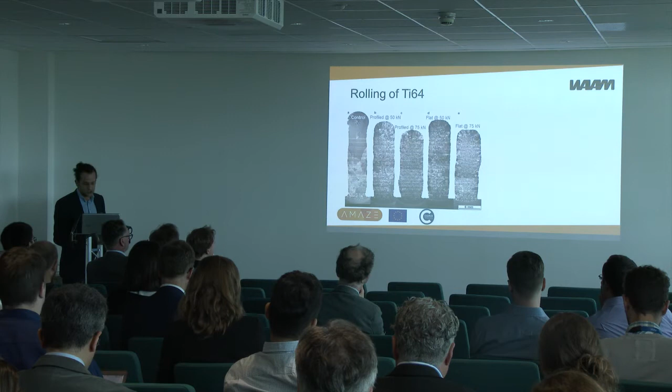Then we also looked at the texture, and we saw that also the texture is changed. And you can see, first of all, the completely different scale bar. So these grains are actually much smaller than what you can see there. But the other thing you need to see is that in this case, the color scheme suggests that the grains are growing all in the vertical direction in the 001, and that also gives anisotropy to the mechanical properties.

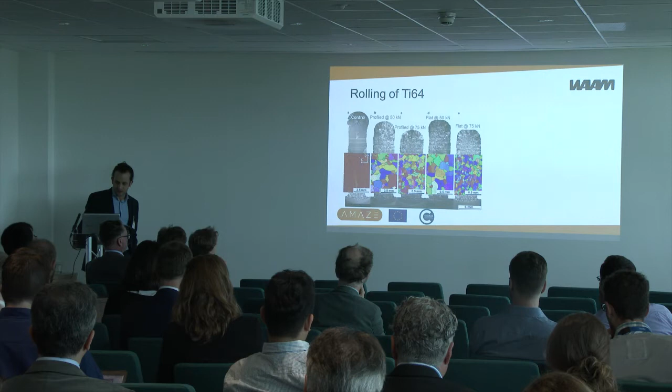While in this case, as you can see, the colors are much more random, and therefore we could argue that the texture is much less than the control case. We also measure the residual stress, and you can see here stress is measured with two different techniques. In this case, we are using a technique called contour method, and I have to thank the chaps at Manchester University for doing the measurements for us.

It's a destructive technique, but it gives you a contour map of the stresses throughout the cross-section. And so while diffraction methods like those ones will give you just points, with the contour we can have a look also at the thickness.

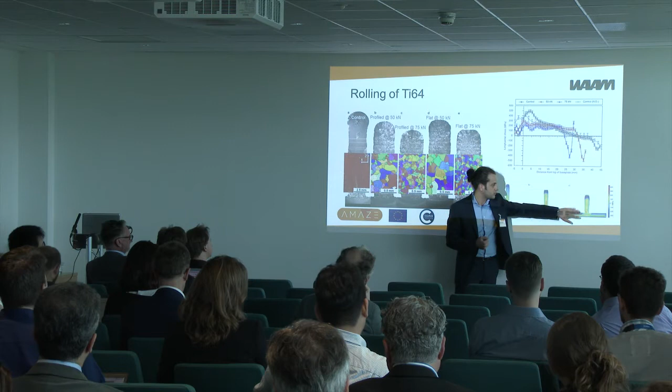And you can see that as we increase the rolling load, the tensile stress becomes gradually lower and much closer to a neutral state. Nevertheless, as you can see from that chart up there, even when we are doing rolling, so with the 50 and 75 kilonewton, stresses are still there.

And that's because, differently from welding, if you are doing rolling of an additive manufacturing structure, when you are deforming the structure from the top, there isn't so much constraint in this direction. And therefore, that's where most of the deformation happens.

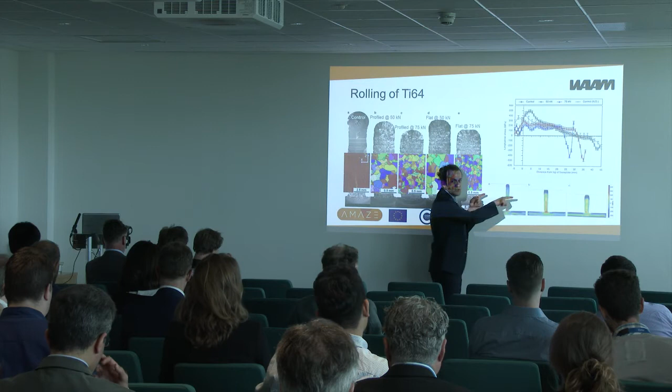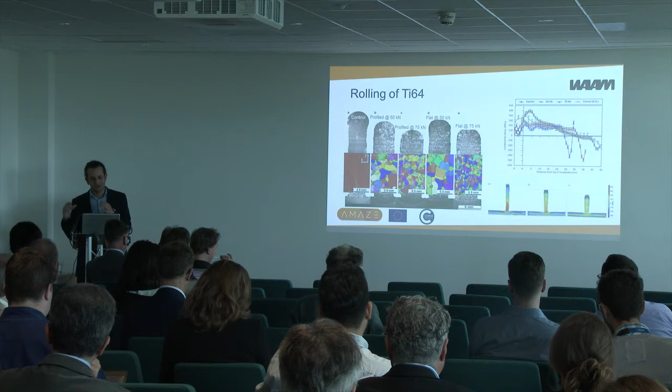But if you want to relieve the residual stress, the deformation has to happen in this direction, that of the longitudinal residual stress. And so, yeah, it's very good for mechanical properties improvement, but not as good for residual stress. Anyway, it doesn't matter because we know how to tackle this problem, as I said, either with the symmetrical building or with very good tooling with which the part is heat treated as a whole assembly.

So, of course, then the next thing we did was checking the mechanical properties. And as you can see from this case, which is the unrolled vertical and unrolled horizontal, we are almost compliant to the specification for wrought products. So we are definitely above the one for additive and cast, almost good for the wrought. Nevertheless, we are still far from the current performances of the wrought material.

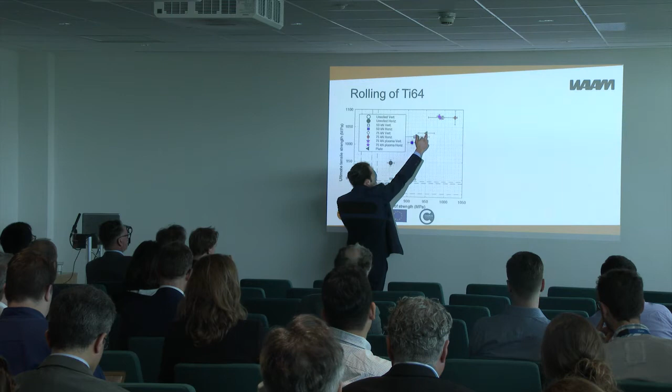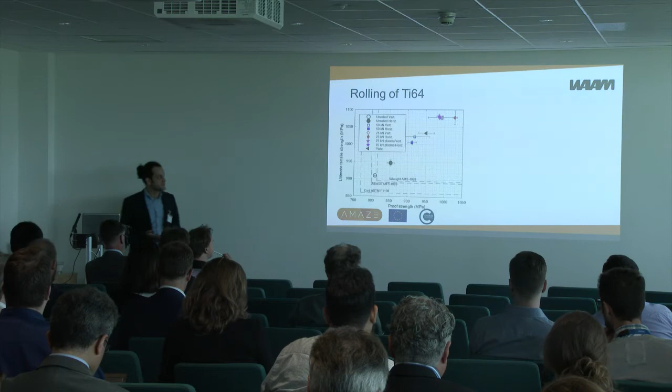The very good news is that as we introduce rolling, this difference is reduced, and then finally for a rolling load of 75 kilonewton, we are producing parts that have got properties that are even better than what's flying today. So we could argue that we can make parts that are cheaper, we can make them faster, and we can also make them lighter. I'm giving you two different data sets for 75 kilonewton because those parts were made on two different machines by two different operators with two different power sources, and they were tested in different places. And it just goes to show that actually we can produce consistent properties also thanks to this addition.

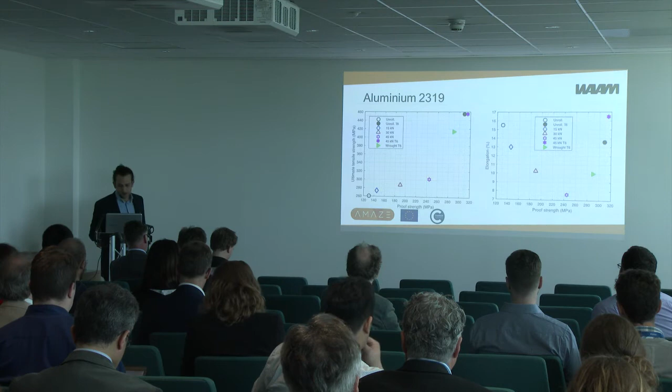2319, a very similar behavior, however, much less effect on the UTS in terms of addition of the rolling, and similarly to the previous case, we get properties that are much better than the wrought alloy, but with the temper. So I'm gonna go ahead and tell you what we can do to avoid the heat treatments in the next few slides.

Now, the problem of top rolling, as I said, is that it doesn't restrain the material in the transverse direction. So what we thought we would do would be to use something called pinch roller, in which you've got 2 rollers that are going against the parts and are rolling in the direction of the travel rather than from the top. We didn't know how to implement this in practice because we actually didn't have the time to design the device. So the easiest thing to do to simulate this, or to cheat in a way, was to build a wall and then flip it by 90 degrees and then literally just roll it on the side using a normal roller from the top.

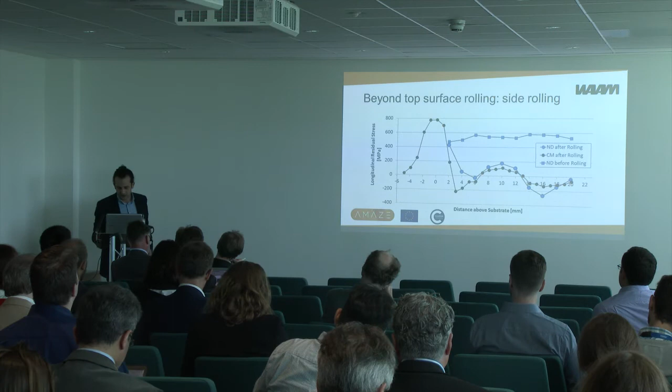And the idea that this works much better is demonstrated by the fact that when you're doing rolling from the side, the residual stress on average is pretty much 0. And in fact, with this method, we were capable of producing parts that had no distortion. The obvious drawback of this approach is that if you're coming towards an intersection, then you can't really go ahead with the pinch roller. And so again, there might be the need for a different process, and I will show you later. And actually, it's this one. It's what we call the pneumatic hammering.

It's a very interesting piece of kit because, first of all, it can be attached to a robot, while rolling, as you have seen from the charts, requires a substantial amount of load, up to 75 kilonewtons, so the machine is really big and expensive. Pneumatic hammering can be done robotically because the load is minimal. The kit is very cheap. The tool can be as cheap as $5,000. And then, because you can do it robotically, you can explore all the 6 degrees of freedom of the robot itself. So you can process pretty much any geometry, and you can actually go deep in the intersections where normally you couldn't have access using the roller. So that's the way it works.

In terms of characterization, to have as much clarity as possible, we applied it on machined surfaces, and that's just because we wanted to be sure that what we were seeing was the real effect of the tool. And the good news is that if you look at the residual stress plot that we've got here, it is very effective in introducing superficial stress. And in fact, this is the surface. This is 1 millimeter below the surface, and you can see there is a lot of stress, compressive stress, up to 1,000 megapascal in the case of titanium. In fact, the yield in compression is higher than the yield in tension, and so we can introduce a lot of cold work in this material using that tool.

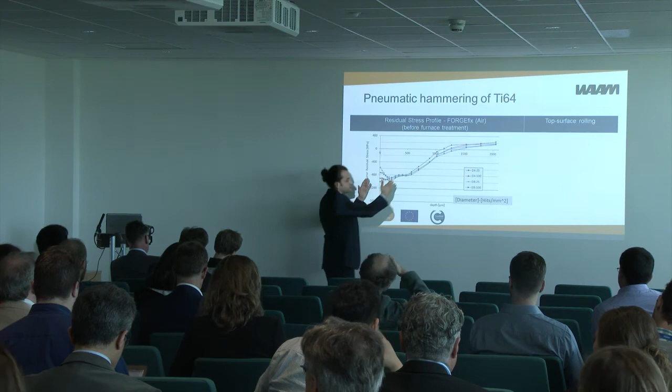So this is very encouraging in terms of applicability of this process. Nevertheless, we shouldn't forget that when we do a rolling pass, there will be another layer deposited on top. And so what is really key is that the depth of what we remelt has to be smaller than the depth of what we cold work. Because if we remelt all of this part, all of this goodness will go away. And that's what we're trying to understand now.

The other implication of this process is that, you know, in aerospace applications these days it's very fashionable to use laser shock peening to improve the damage tolerance properties of the surface. But laser shock peening is an expensive process. It requires big lasers, ablative paint, water. And maybe this would be a cheaper option to achieve the same results in a much easier way, actually.

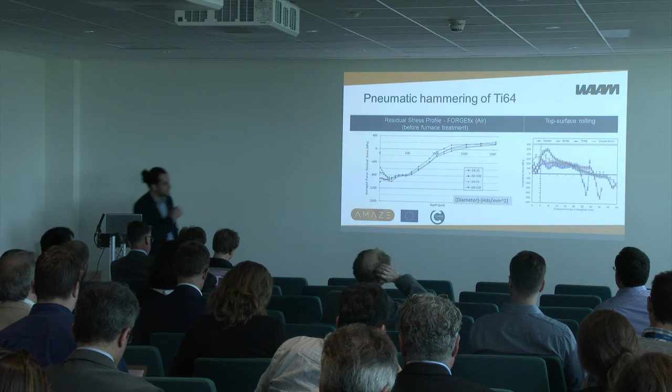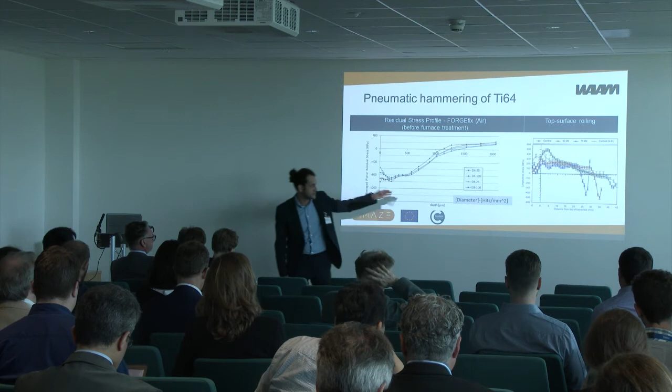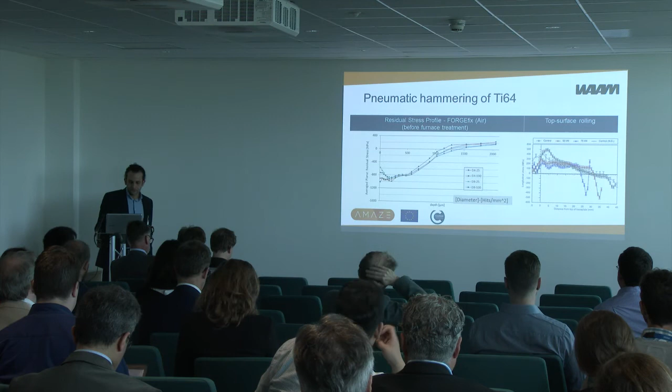Then we did the same treatment to 2319, and it's striking how much porosity has disappeared thanks to this process. Now the question is, we don't know whether the porosity has just been squashed or actually the hydrogen is in solution in this case. Nevertheless, the effect is evident and promising. And as you can see, with the addition of the pneumatic hammer treatment, we can improve the hardness substantially. And then with artificial aging, it goes up even further, as you would expect.

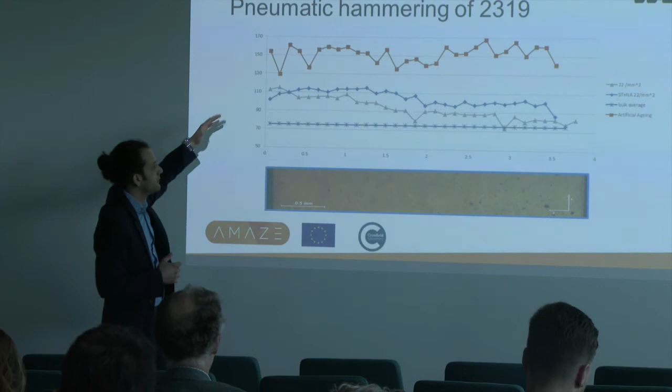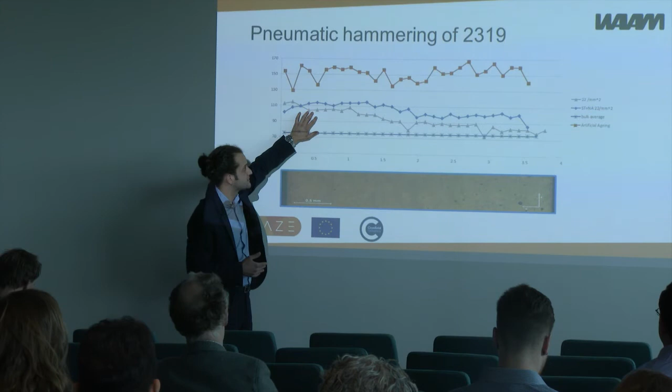Now, going back to my point about the heat treatment, what we're trying to understand now, and we've got another PhD just starting on this, is can we push these trend lines farther up so to avoid the requirement for heat treatments altogether? And hopefully yes, but we will let you know.

That was the part of the cold work, and now the second part is the one on the deposition of tungsten. I'm presenting the work of Gianrocco, who's with us in the audience, and he's about to finish his PhD, hopefully. So the first problem we had with tungsten is that, of course, it's got the highest melting point of all of them. And when we tried to deposit tungsten the first time, actually, I was doing those experiments towards the end of my own PhD, I was able to melt everything in the setup apart from the wire. And that wasn't really encouraging, as you would expect.

And then we tried with the highest power of the lasers that we had, 8 kilowatt, and we were almost drilling another hole in the ceiling. So we were a little bit lost. And eventually we decided to go back to TIG, but with a key variation. Instead of using argon as process gas, we switched to helium, 100% helium. This automatically gave us 3 times the voltage, which means 3 times the heat input, and all of a sudden we had 10 kilowatt available, and that worked really well. And just to put things in context, this study on refractory metals is for nuclear fusion application, and David will follow after me and he will tell you all about it.

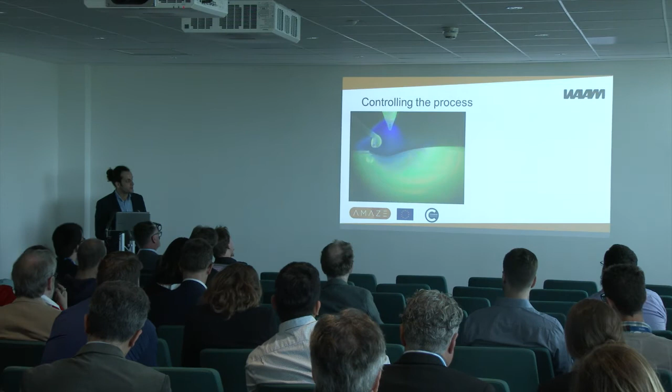Now, the first step, once we were actually able to melt the wire, was to get some stable deposition. And the problem of tungsten is that as the temperature goes up, the thermal conductivity goes down, and the electrical resistivity goes up. And in fact, that's why it's used for light bulbs. And the problem is that the effect of these two events is that you effectively are creating an insulating belt around the melt pool. The heat builds up more and more, and all of a sudden, instead of building material, we are drilling holes. And that's a little bit defeating the purpose of additive.

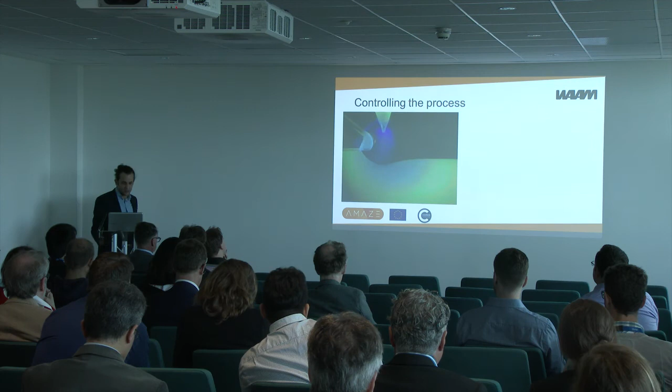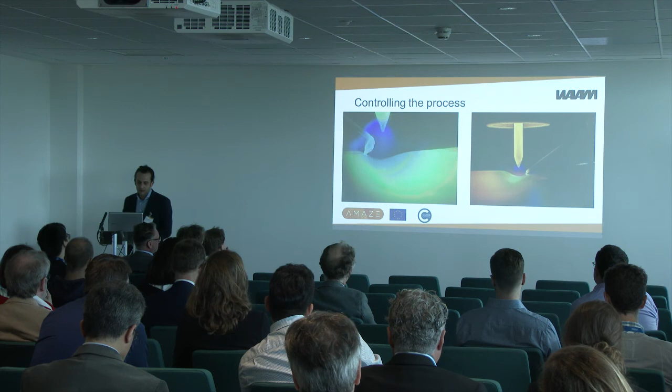So we said, okay, we need to do something. And Gianrocco developed an advanced control system based on him looking at the screen and sloping down the current. And with this very advanced device, we were able to have a very nice and stable deposition, which then enabled us to build deposits that we could then characterize.

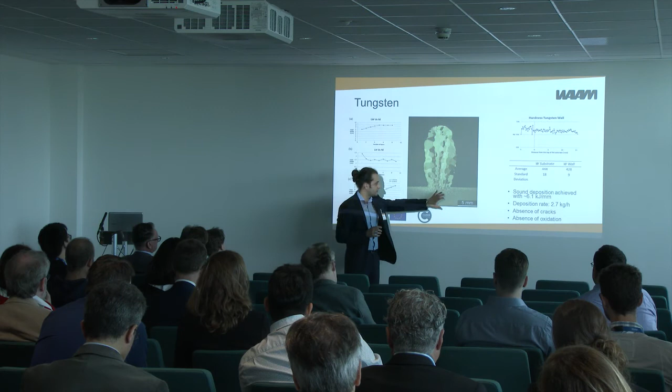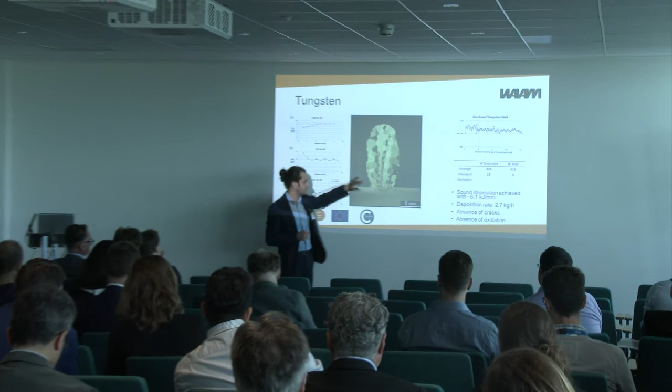So that's the first real part that we made. And critically, you can see here it was made on a plate which was flat. We abandoned this option immediately because we had cracks coming from the edges of the substrate. So the material was not cracking at all. Our material was good. The cracks were coming from here and then eventually traveling inside and then breaking samples. So what we did was flipping the plate by 90 degrees and depositing on the edge. So there were no open edges for the crack to start.

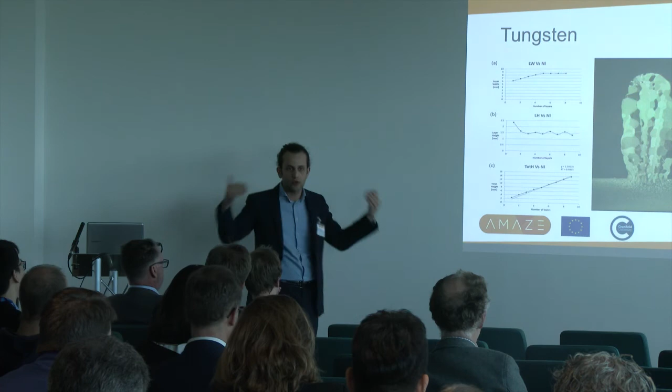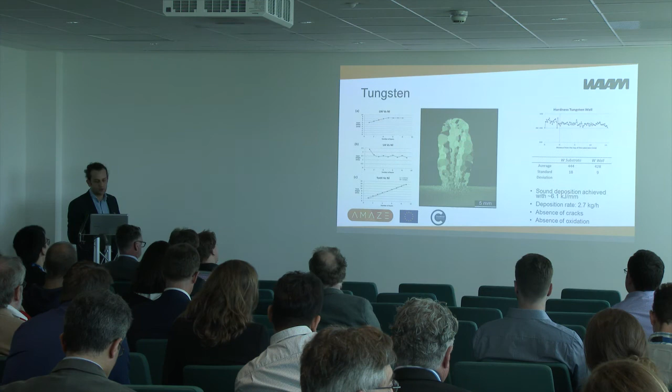And of course, I forgot to add the photo in the slides, but the specimen is downstairs. So if you go to our desk, you can have a look at the little component. Anyway, the good news is that we achieved 3 kilograms an hour of deposition rates. We were able to produce parts without cracks. There was no oxidation. We have tested some mechanical properties like the hardness, and Gianrocco has just finished building a lot of panels for the extraction of specimens for mechanical testing and thermal testing, and hopefully we'll have the results in the next few months.

Then one of the requirements from the Center for Nuclear Fusion was to have a graded structure which had tungsten on the top to face the radiation coming from the core of the reactor, and then the underlying structure had to be made of molybdenum to give mechanical strength. And we were able to achieve a very nice gradient. Unfortunately, it happens over 4 millimeters of length, and the requirements coming from CCFE were actually for a 1 millimeter graded structure. So we're going to do some optimization of the parameters to see if we can get there.

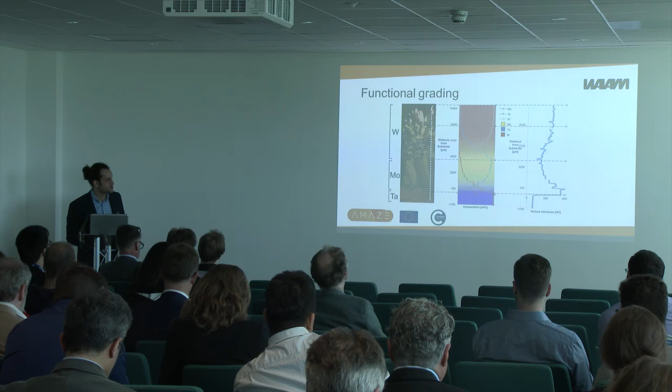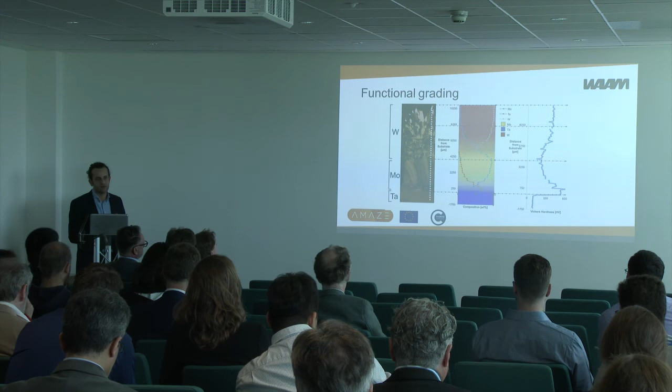But again, it's very promising, and of course, the two materials like each other, so there is miscibility from a phase diagram point of view. So there were no problems with intermetallics or anything like that, which is, of course, making our life a lot easier. So that's it for me.